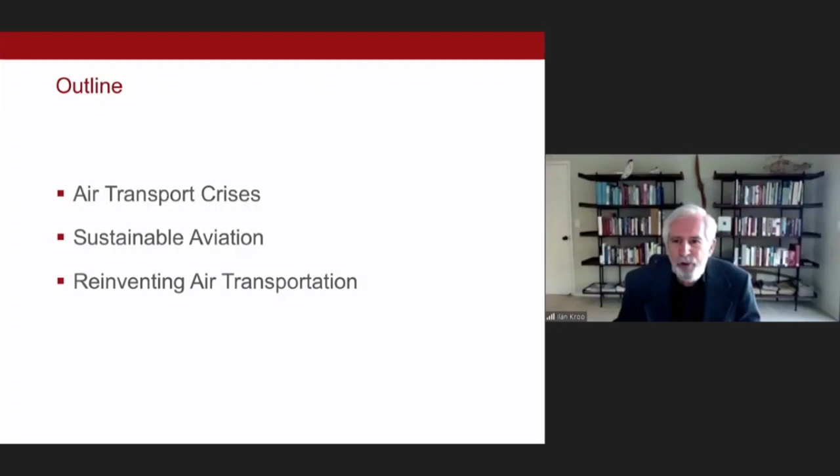So, well, flight and the idea of air transportation has inspired people for ages, from Icarus and Daedalus to children and people of my age all around the world.

And one of those people was William Henson, who in 1843 decided that he was going to build an airline and an airplane company. So what you see on this slide is a picture of a tea towel that he used for marketing purposes to try to raise money for this startup a long time ago.

Don't read the text on the left. I'll read you the important things there. But as you can see, it actually preceded many of the inventions that came much later. So he patented this aerial steam carriage in 1843 and worked with John Stringfellow and Frederick Marriott.

After Henson stopped working on the actual airplane, Marriott continued working on flying machines while becoming a well-known publisher in San Francisco. So it has a local flavor here too, this history. He built several models, some as long as 28 feet.

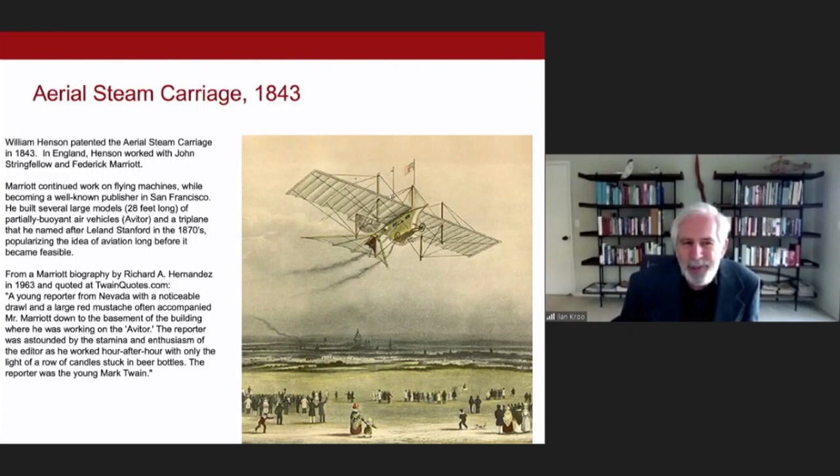So we spend a lot of time with transportation, and this is a plot of the number of minutes spent versus the year. Among other things, you can see that people in California spend more than an hour and a half traveling per day.

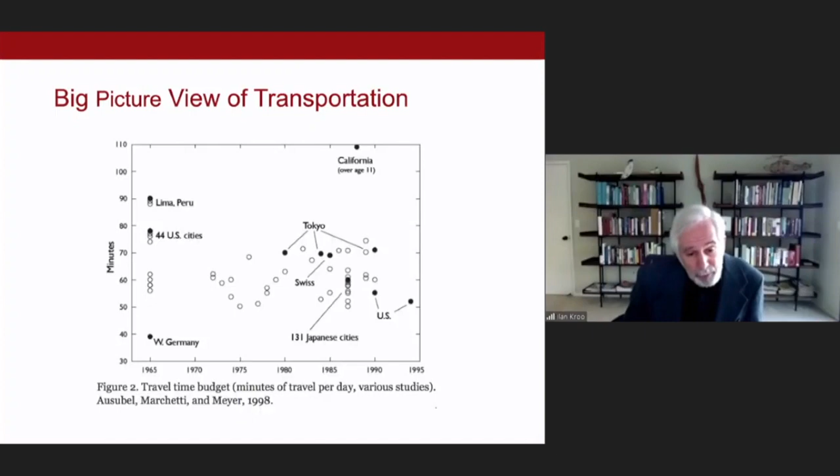And despite the fact that aviation has been around and going faster and faster on the horizontal axis, we still spend a lot of time traveling, whether it's by air or car or whatever. So it's important, even for those of us who are not working in the field of transportation, to look at how we're getting around.

This is the same kind of plot, but it goes from 1880 to 2000-something. On the vertical axis is the number of miles traveled per day, per capita—so it's the range that people travel.

You can see there are different modes of transportation. The highest lines are cars, buses, and motorcycles with a linear fit there. There's walking underneath that. There are trains, which have been actually decreasing since 1900, as has walking.

Air travel has been going up since 1940 or so, and looks like it's going up to at least the year 2000, while horses got down to a very small range by the 1920s. So we are well past peak horse, but we're not, on this plot, past peak air.

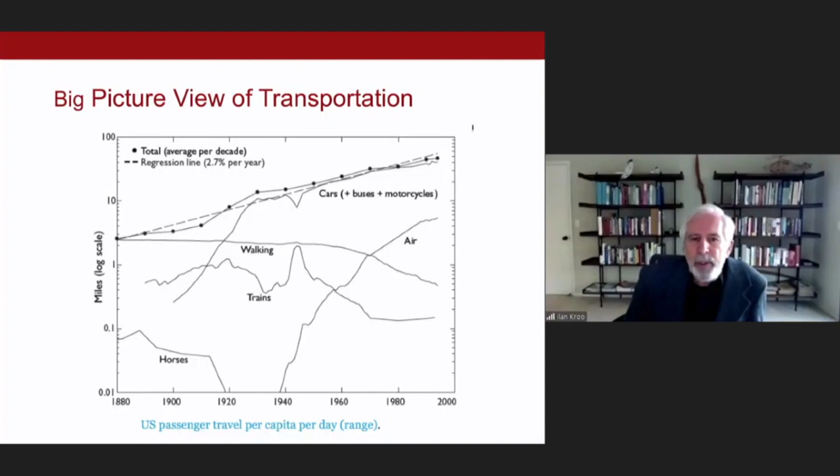So air travel is, of course, very important to many, many people. But it's interesting to look at how it's developed.

This is not going to be a long history, but here is a picture of a 707 in the upper left of this slide. It was first flown around 1957. To the lower right, you see an Airbus A340, which is still flying from time to time out of San Francisco Airport. It first started flying in 1993, but it is a mainstay of several airlines still.

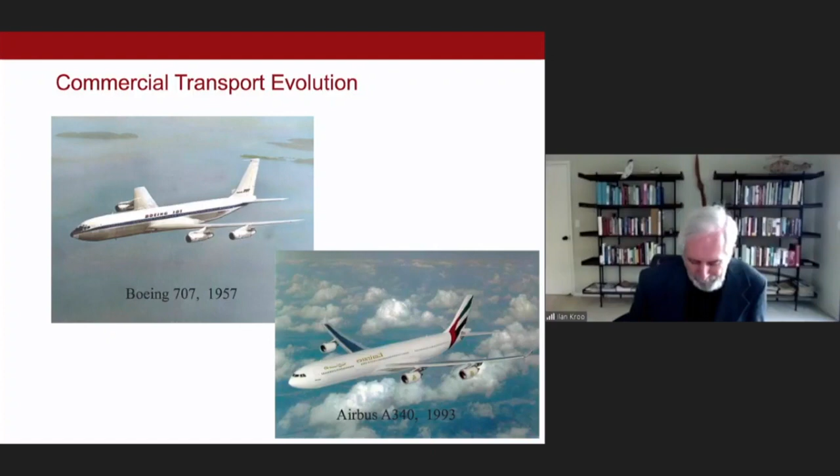The interesting thing about this is that if you ask someone at San Francisco which was a 707 and which was an A340, they would probably not know. They're very similar, and it gives people the impression that not much has changed in 35, 40 years. And to some extent, that's true—the airplanes look like they did a very long time ago. Well, not only do they look like they did a long time ago, but their performance is not terribly different.

So this is a plot which on the horizontal axis is the year that the airplane entered service, and on the vertical axis is a measure of performance. The measure of performance here is the Mach number, which is really the speed divided by the speed of sound—so it's proportional to the speed, times the ratio of the maximum lift to drag.

The ratio of lift to drag, especially when multiplied by Mach number, is usually used as a metric of aerodynamic performance, although people would argue whether that should be the case.

These are for large commercial airplanes. You see the 707 on the left being just under 15 on this scale. A 747 is about 15. A DC-10 is down a little bit less than 15. An MD-11 on the right, in 1989 or so, which was a variant of the DC-10, is up at 15 again.

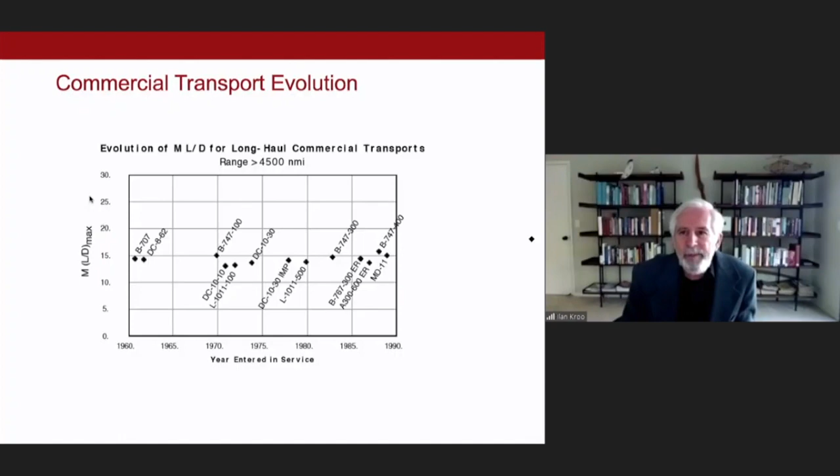So from 1960 to 1990, it looks like there was essentially no change in performance. Not just that they looked the same, but in fact many things about them were quite similar. We'll come back to this in just a moment.

Boeing is very proud to tout the increasing efficiency of their jet transports in recent years. Here's a picture of the Boeing 787, which compared to the previous generation of airplanes, such as the 767, has about 20% fuel savings and about an 8% better specific fuel consumption, which means the engine efficiency. So the engines are roughly 8% more efficient than they were on the 767.

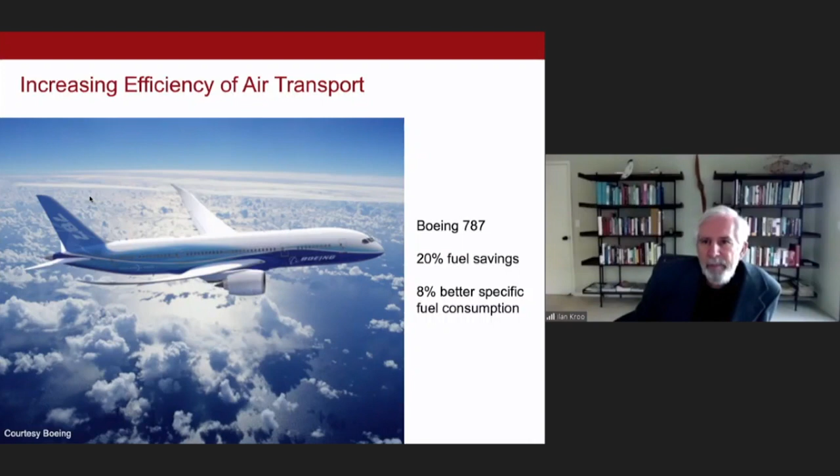So here's where we are right now, a very broad brush look at where we are. But we know that things are changing now in the airline industry, in the commercial airplane business, et cetera. So we're going to first look at why this is not going to maintain a stagnant situation with respect to performance and commercial utility.

So I'm going to talk with you today about these three areas, talking about current crises in air transportation. That's where we'll start, and I'm going to talk about safety, economics, and health. Then I'm also going to talk about some environmental issues that are being addressed and need to be addressed.

Here is a picture of an airplane in 2020 from CNN, and here you see people wearing masks, but packed into this airplane. This has become a very important thing for the airplane companies to focus on: how you can modify the airplane so that people are not in such close quarters and packed in, how you can modify the airplane so the filtration system is dramatically better, and how you can manage the airplane so people getting on don't have to brush by each other. Airbus and Boeing are working very hard at some very new ideas for making these things safer, because they can't afford not to.

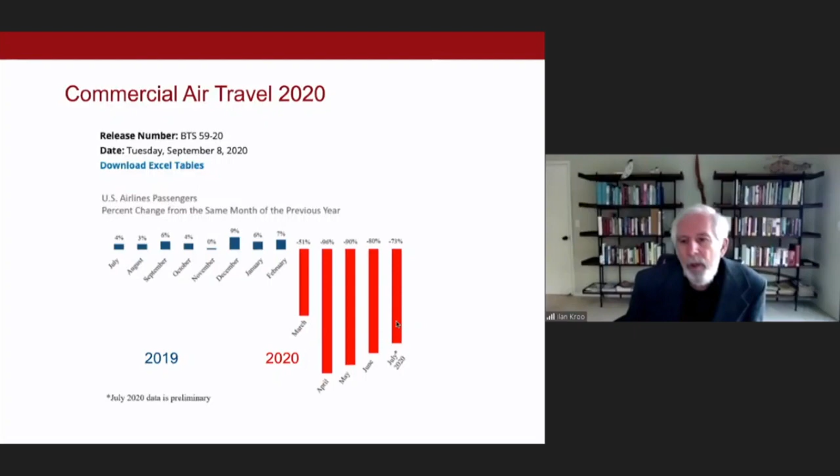So Boeing likes to also show how efficient their aircraft are, for good reason. Back in the 1960s, when those 707s were flying, they were using early jet engines, and compared with the engines in the 767, sort of second generation jet engine timeframe, they used 70% more fuel per seat kilometer. So a huge amount of fuel being used in the early days. These first generations of modern high bypass ratio engines, used on the 727, did definitely somewhat better. The 767 was better yet.

We saw that the 787 used engines that were about 8% better than the 767 engines. Other improvements were made along the way so that relative fuel use combines the engine improvements with aerodynamics and structures. The 787 has a great deal of composite structures, carbon fiber, et cetera, on it. All combined, that leads to a very substantial reduction from Boeing's early airplanes to their current airplanes.

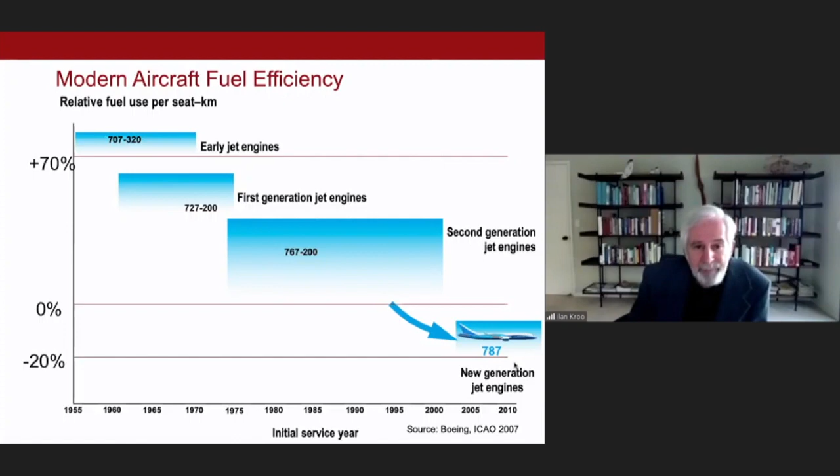They also like to show statistics like this, which are interesting, and they're absolutely right. If you fly from Seattle to Washington, D.C. on a 737-800, and the number of passengers is 80% of the maximum number that can fit on it, which is not a terribly uncommon load factor ratio of actual passengers to number of seats, with those assumptions that airplane can fly from Seattle to Washington, D.C.

And if you take the total fuel required for the airplane and the total number of passengers on that airplane, that translates to 29 gallons per passenger to go from Seattle to DC, which is a whole lot less than a car. This is 81 passenger miles per gallon.

A typical car in the San Francisco Bay Area, if you said it gets 25 miles per gallon, and actually the statistics say that the load factor, or the number of passengers on average, is about 1.3 passengers per car in the Bay Area. That's only 32 passenger miles per gallon, and that's similar to Amtrak, by the way.

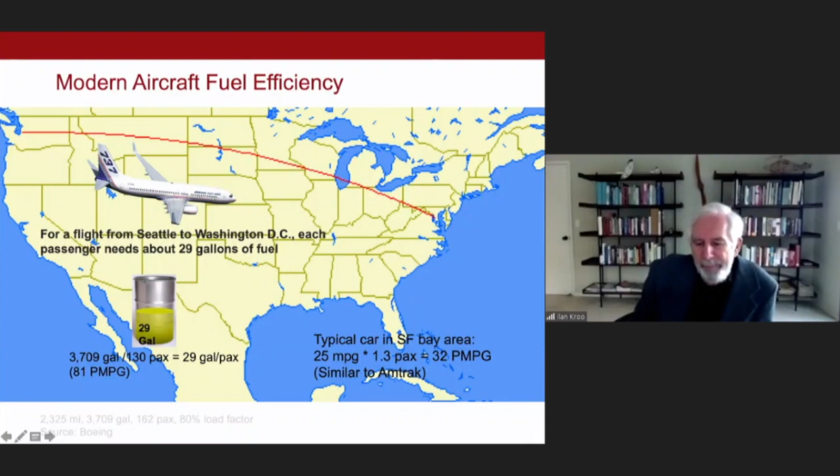However, that's the good side of the story. The other side of the story is that this contributes to the crisis we're having, one of the crises in air transportation.

Transportation in general is responsible for about 13 to 20% of all greenhouse gas emissions. Aviation is about 13% of that. So 13% times something between 13 and 20% sounds like 2% to 3% of CO2. But the net effect is actually 2 to 4 times that amount, and is increasing. It's increasing, or it has been increasing until April of this year. It's increasing because the number of passengers is increasing, the number of airplanes is going up, and the load factor is not changing dramatically.

So from the IPCC report, aviation is about 13% of CO2 emissions globally in the transport arena. Road transport is something like 74%, so it is considerably higher. But that's not a tiny number, especially since this is just CO2 — the contribution to global warming is probably 2 to 4 times as much as the CO2 output for aviation anyway.

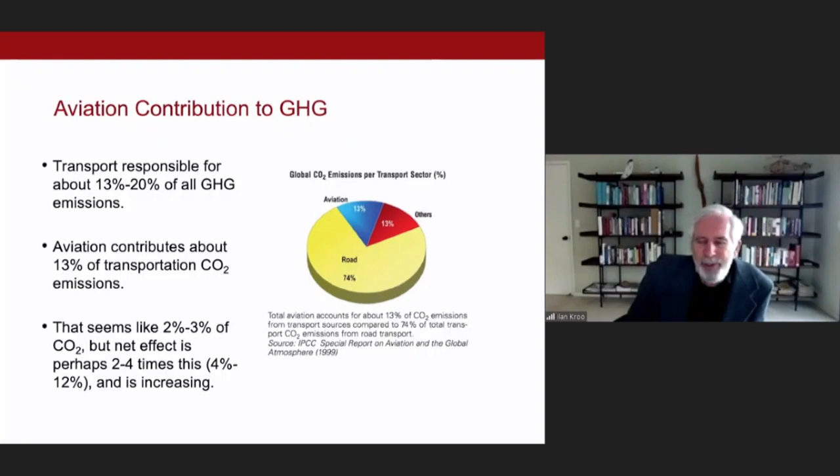So this has been concerning people for the last, well, depending on the person, 20 years, 10 years, whatever. And it's gotten to the point where both public and political pressure is really mounting on the impact of airplanes on the atmosphere. Here's a quote from CNN and Friends of the Earth: air travel is the world's fastest growing source of greenhouse gases. And it is the case that each long distance flight of the 747 adds approximately 400 tons of CO2 to the atmosphere.

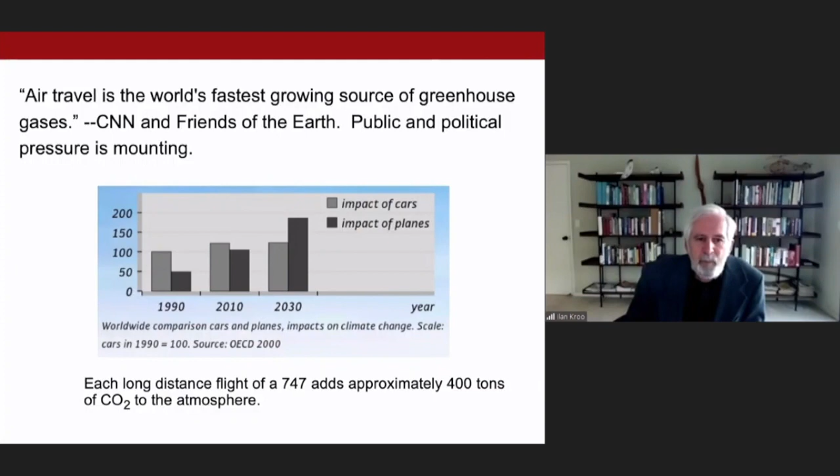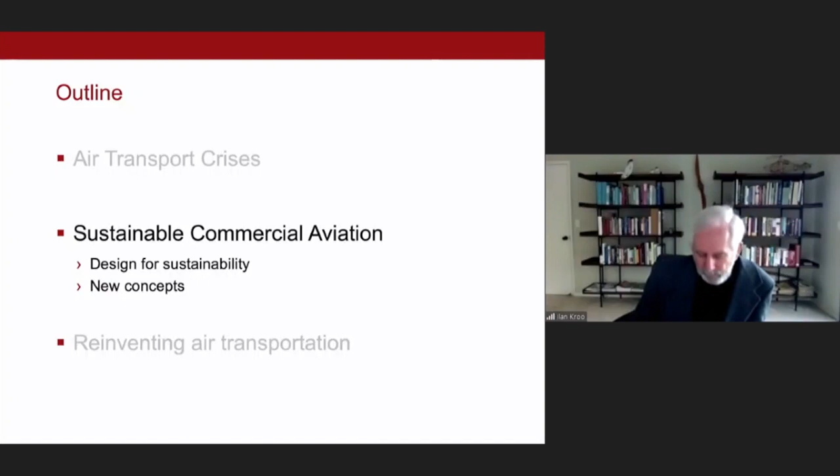So the next topic I'm going to cover is sustainable commercial aviation — how could we take airplanes that cause such problems for the environment and design them in such a way that they don't just make the most money, but also have some significant constraints on the environmental effects. So what I call sustainable commercial aviation includes designing for sustainability, and that involves some new concepts as well. So let me talk about that.

You remember that one of those plots showed the lift to drag ratio times Mach number of airplanes throughout many years. If you translated that 15 to 17 number of Mach times lift to drag ratio to just the lift to drag ratio, all of those airplanes flew at very nearly the same Mach number. The 787 flies a little faster than some of the earlier, smaller airplanes. But we can look at other transportation modes.

The reason you need propulsion, if you are not accelerating but going at a constant speed, not climbing or changing altitude, is to overcome the drag force. So this is why lift to drag ratio is an important aerodynamic performance parameter.

Here's a passenger car, some BMW, and it has a lift to drag ratio. Its lift comes from the reaction of the tires on the road, the vertical component, and the drag is due to some rolling resistance as well as the aerodynamic drag. If you work out the numbers for this particular car, at zero speed or very nearly zero speed, the lift to drag ratio is about 100 to 1, which is good, but the car isn't doing anything, so it's not so good.

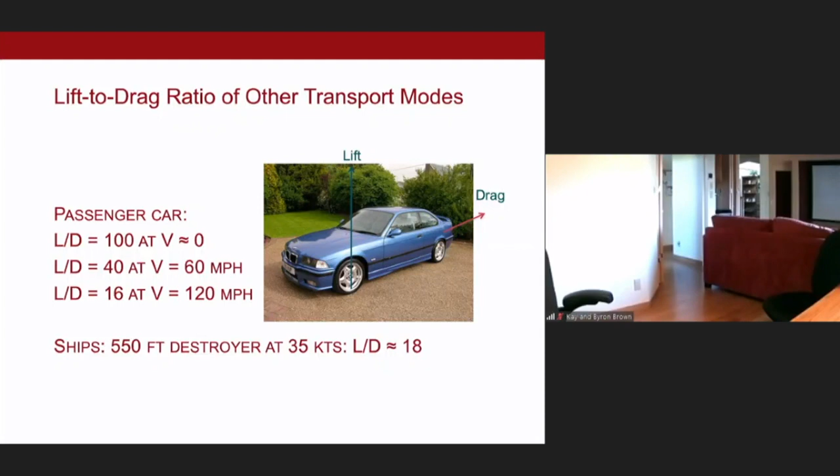So from a fundamental standpoint, what the engines have to overcome besides all those ancillary things like friction and the air conditioner, etc., is the drag. Passenger cars are definitely not, especially for the speed, fundamentally more efficient. Ships can be, if they go very slowly, they're like the car in that they have low drag, but they don't accomplish what they're trying to do.

I found data on a 550-foot destroyer at 35 knots, and the article gave the drag of that and the horsepower required to make it go 35 knots. That translates to a lift to drag ratio of 18 to 1, which is pretty similar to the airplanes. But of course, lift to drag ratio is not the only metric that's important. Speed is very important. That's why airplanes cost more to travel on than kayaks.

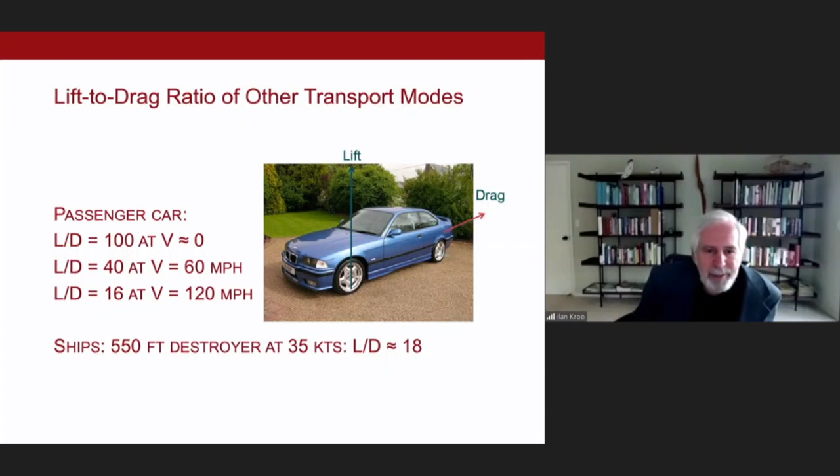But the question is, if everything is about 15 to 20 for L over D, is there anything you can do to the airplanes to change that, or is that a fundamental physical phenomenon?

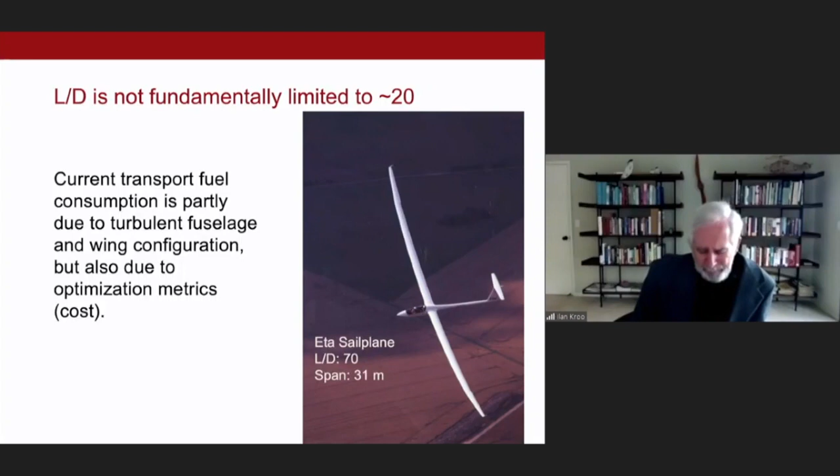Current transport airplane fuel consumption is partly due to the turbulent fuselage and wing, but also due to the fact that people aren't optimizing for minimum environmental impact. So what people do in designing airplanes is to model the airplane performance in general, how long it takes, how long a runway it requires to take off, some of the stability and control requirements.

People estimate the weight of the airplane before it's ever built. They estimate the aerodynamics, the noise, the engine performance, and even the economics, and combine this with numerical optimization to try to get the best airplane, whatever that means.

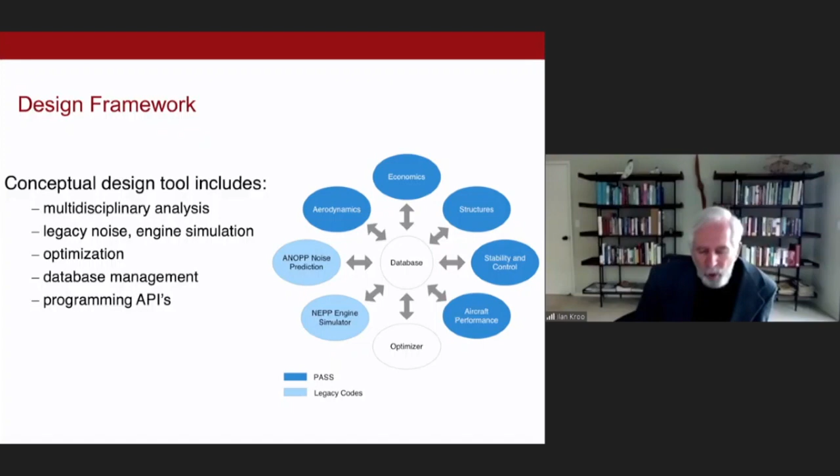By doing that, one really has to think about many different things. While cost is seemingly a bottom line, there are many constraints that go with airplanes. One of them is the economics.

There are also environmental constraints, and passengers, again, need to be comfortable in the airplane, and there are a bunch of constraints associated with regulations that require that you be able to get out of the airplane on the ground in a certain time. So all of these things have to be shown to satisfy the relevant regulations.

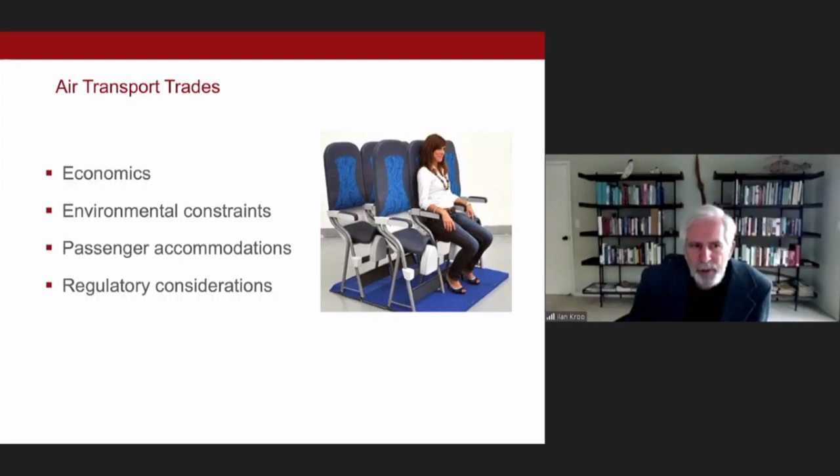We saw a little bit that the optimization included a bunch of environmental constraints, but those are actually very difficult to try to model. And so here, for example, we hear a lot about CO2 and how it affects the warming of the atmosphere.

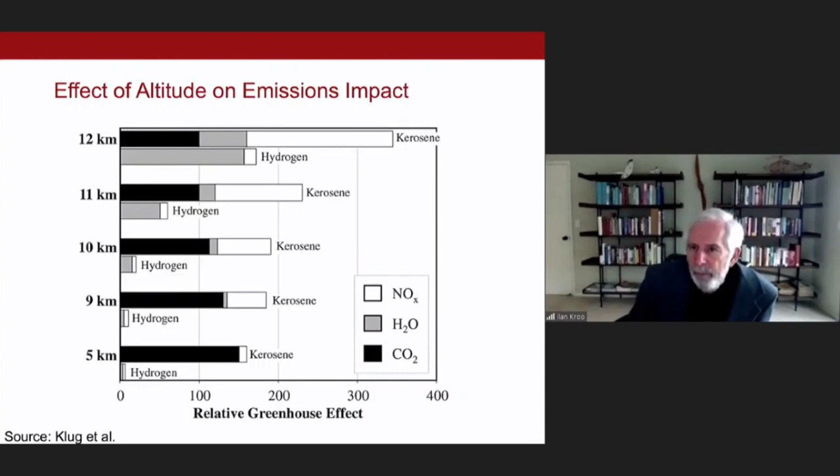But you have to model this very carefully in order to be able to do the optimization, which a student of mine did and which people at the major airplane companies now do. She did this for her PhD thesis, and it was very interesting.

What she did, first of all, was to minimize cost. And she varied not only the flight path and the kinds of engines and the size of the engines, but also the airplane geometry, different wing sizes, different thicknesses, all of these things.

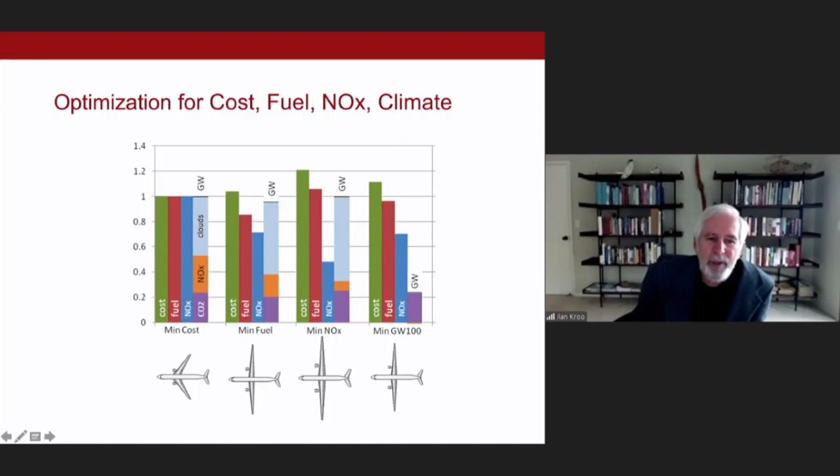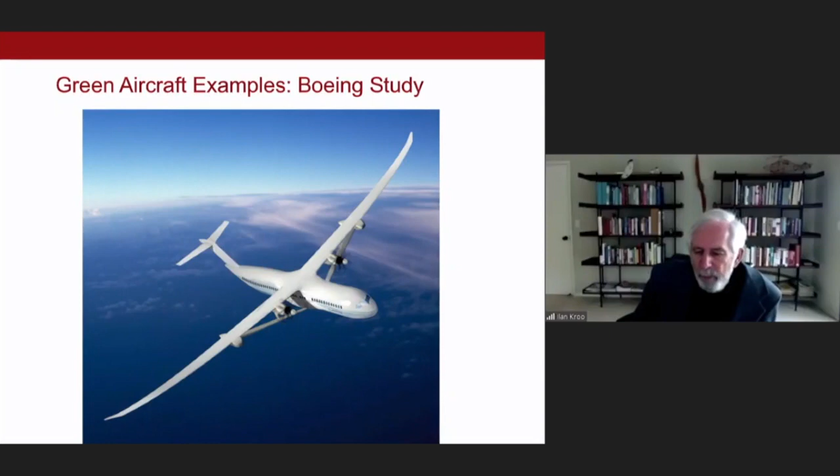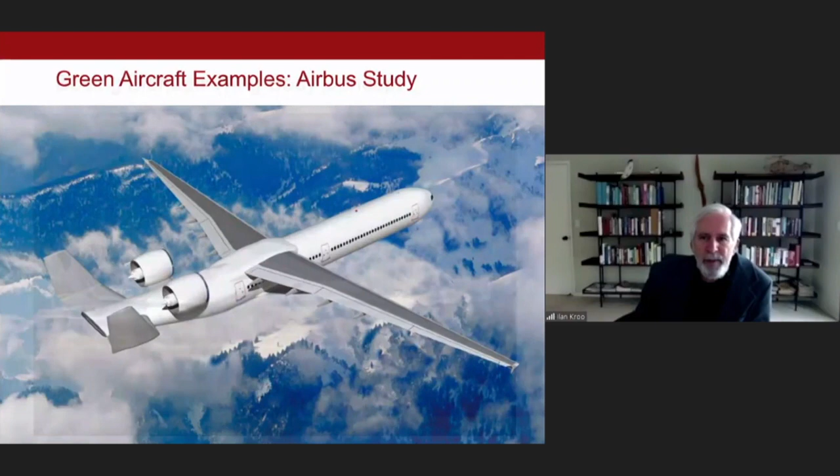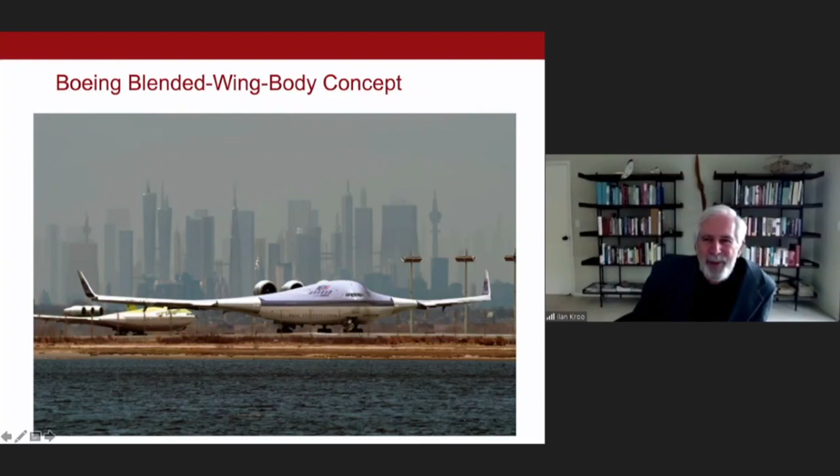So with that, I am getting ready to talk about the last part of the discussion here: reinventing air transportation. I thought, both because it's pretty easy to get zoomed out on these things and get tired of sitting there looking at a screen, we might have some questions and do this more interactively for a few minutes. Luann, do you have anything?

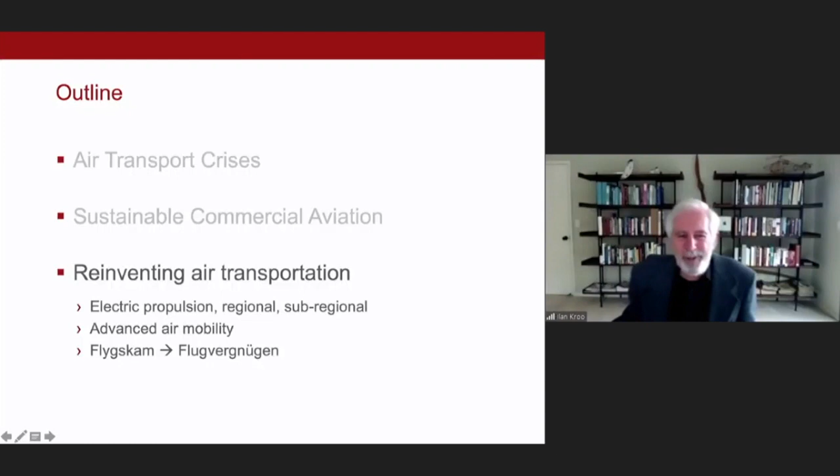Okay, so this last area is associated with doing pretty dramatic things to our air transportation system, and that's why I call it reinventing air transportation. It will deal with electric propulsion and how that might be used in regional or sub-regional - sub-regional being a term mostly used in Europe right now, but we'll probably hear more of that - shorter range commercial airplane flights. Advanced air mobility was for quite some time called urban air mobility by Uber and others doing vertical takeoff airplanes. It's now called advanced air mobility because it doesn't necessarily mean vertical takeoff, as we'll see. The idea here is to turn flight shaming into flight pleasure, which is apparently the German word that's pretty much the opposite of that. So let's see what we're talking about.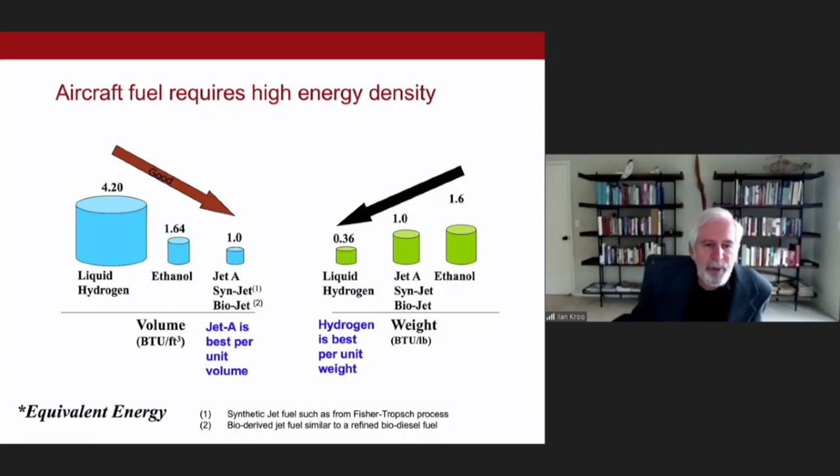But you might also look at the weight. So for the same amount of energy, you get only 36% the weight if you're using liquid hydrogen. Jet A is again normalized to 1, and ethanol has more weight for a given energy level. So you have to look at all of these considerations and all of the other things not listed on this slide that are important possible things to use for fuel for an airplane.

And you have to look not just at energy, volume, and weight, but specific power too - how much power a system can generate per unit mass, for example. On the vertical axis here we have watts per kilogram of specific power. We see that combustion engines are really high up here, producing a certain amount of power per unit mass.

Whereas here's some batteries. Here's a dry cell, which produces a range of specific powers depending on its geometry and chemistry, etc. On the horizontal axis is the specific energy, and by specific power or energy we mean the particular amount of power or energy per unit mass. So specific energy is measured in watt hours per kilogram.

A Tesla's batteries are about 200 and something, maybe 240 at the cell level, watt hours per kilogram. So that's kind of at this point on the horizontal axis. They're also pretty decent at specific power.

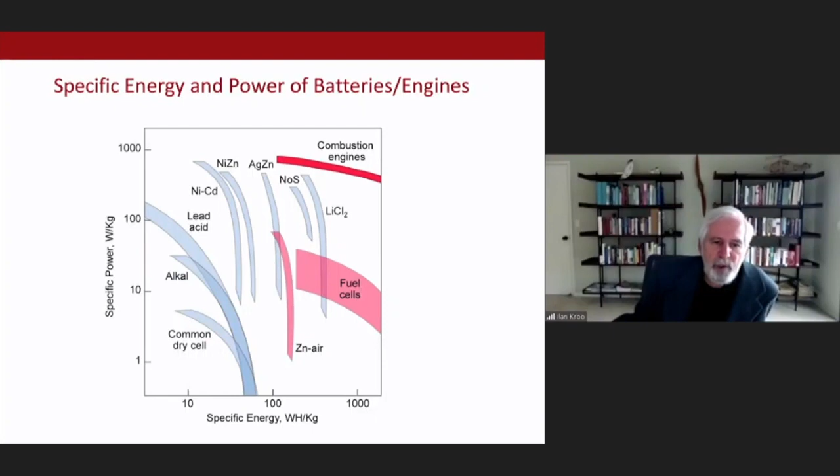Here we have a number of different chemistries that could be used for storing energy in some way. Batteries are very interesting. As I said, the lithium polymer or lithium ion batteries used in a Tesla are something over 200, and it depends whether you're talking about the cell level or the complete battery level, and those can differ by more than 20%. That is, you have to multiply the watt hours per kilogram by 0.7 or 0.8 to get the battery level values from the cell levels.

Anyway, there's a lot of battery research going on. This one is by a company called Amprius, which I think is located in Saratoga - not very far away anyway. It replaces the anode that might be used in conventional batteries with silicon nanowire, and it's actually gotten up to about 400 plus watt hours per kilogram.

This number strikes people as being super important because it really makes many electric airplanes viable. If you have substantially less than this, like half of it, which is still a pretty good battery, you have a very limited range or time in the air, etc.

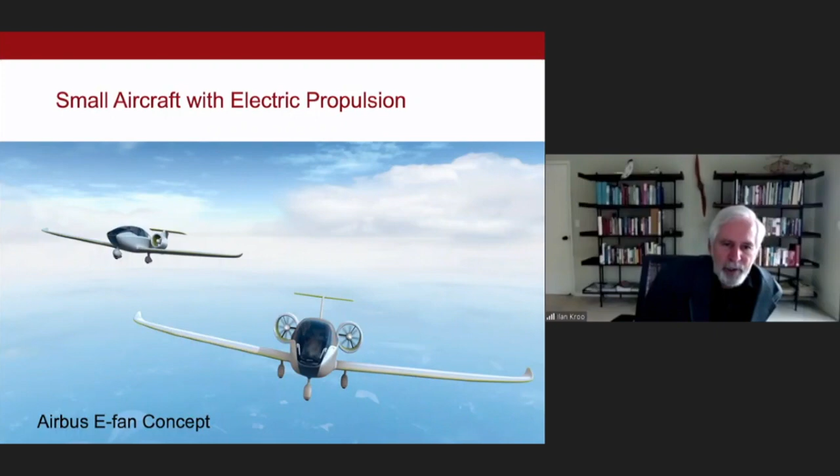So there are many reasons that people are looking at small electric airplanes, and small because the battery energy just scales better at small sizes, where you don't need quite so much power or energy for a given time.

So this is one thing that has excited people, not only for traveling the way most people do in today's commercial airplanes, but being able to get around for regional distances from city to city, or even from one part of a city to a much more distant part of the city. I'll say more about that in a minute. But if you could do that, it would save people an awful lot of time.

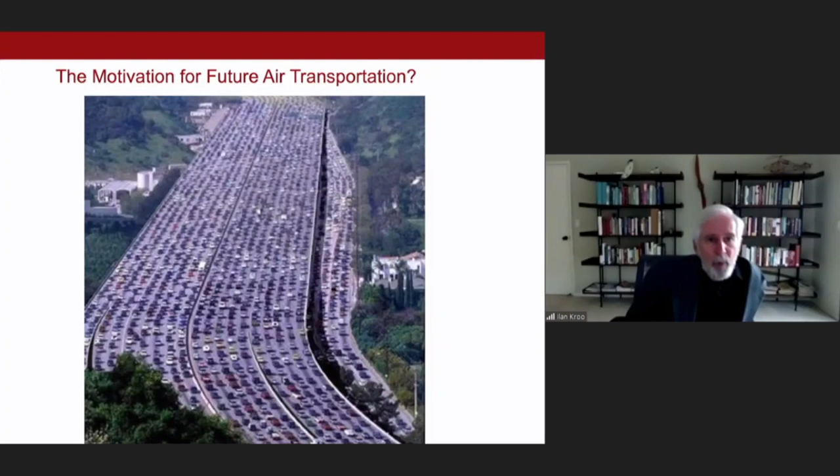So there are now many companies looking at ways to possibly do that. This is a pretty new company called Electra.aero, and they are mostly folks from MIT and others who have been in the airplane business.

This is an eSTOL, an electric short takeoff and landing airplane. It is made to be very efficient and is all electric. This is just an artist concept, so they're working on figuring out just how feasible it is. But the idea is to land on a very short runway, so it could even be this platform out on a river here.

And this looks like New York. But in any case, the idea is that this would hold a few passengers, maybe from 4 to 9, but this airplane is right now just a design concept. It could be very interesting because you don't always have to be flying in an airplane that can go 2,500 nautical miles. So you could do this, which would be very interesting. And I'm quite interested in variants of this, which are maybe less complicated but still might serve the same group of people who want to travel and be very clean and efficient.

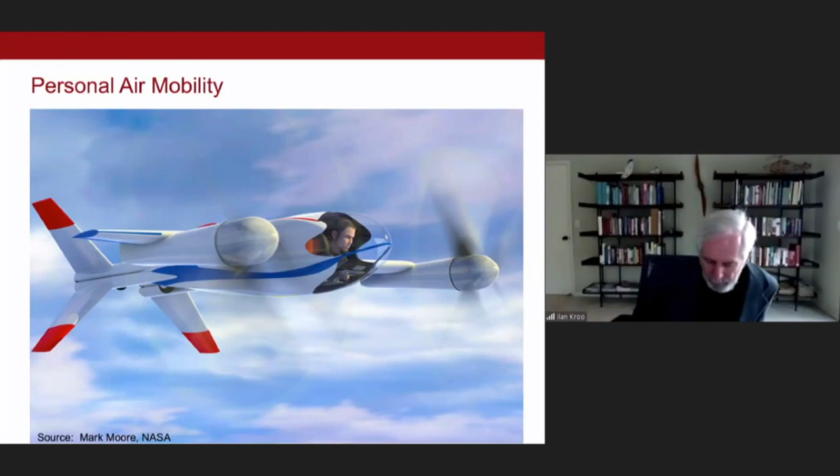Of course, you could just do something like this. This was in the very early days of people trying to do this. These look like model airplane motors, and you need lots of them and lots of propellers, not only to get the thrust needed to take off, but also to be reasonably robust to failures. I don't know the exact date, but relative to some other things that I remember, it was probably 8 to 10 years ago. So these were early days of electric vertical takeoff and landing airplanes.

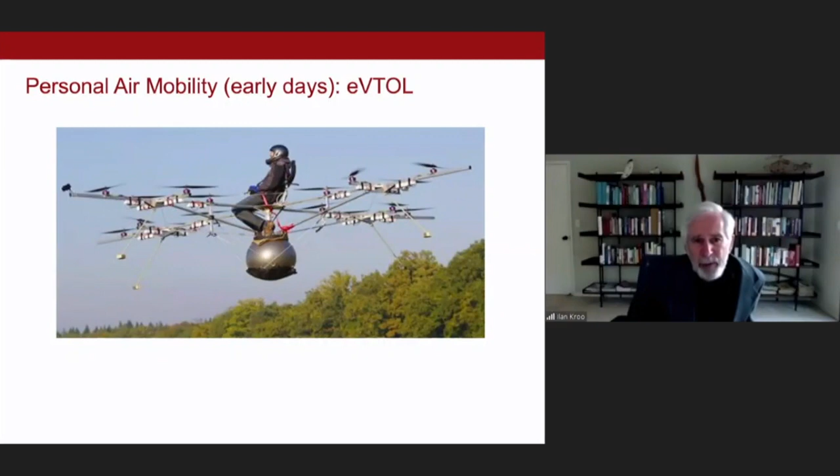This actually became the German Volocopter. And here you see a picture of it many years later. This picture is taken in 2016, and it is flying with the same large number of rotors, again probably for redundancy, and a much more reasonable looking fuselage.

I mention this because there was an announcement today on Volocopter, and they published this picture. It has some very sophisticated control systems. They have been flying for quite a while, and it looks interesting. But the announcement today was that you can buy a ticket, or reserve a ticket anyway.

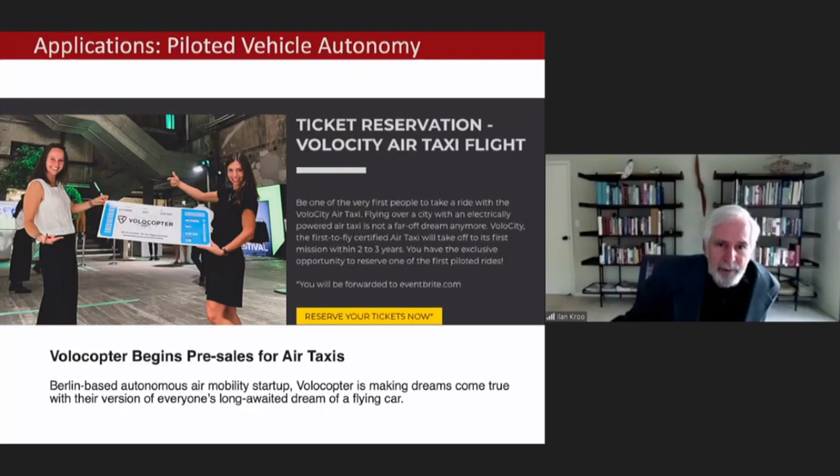And they're selling 1,000 of these tickets, and you just go to eventbrite.com, or you can also just Google Volocopter. It's becoming a lot more believable when some of these folks, like EHang, are flying tourists around for sightseeing in China, and people are delivering medical supplies and all kinds of interesting things. So that's an interesting, nicely put together eVTOL, along with some others.

In addition to designing some very nice camera tripods. That's another story.

Here's a similar configuration that flew quite some time ago, in this case autonomously. And here is the Zee.Aero configuration, which was a prototype for a bunch of other things that followed. This was an airplane that weighed somewhere between 600 and 800 pounds.

We at Zee.Aero at the time built the motors for it, the flight control system, and even most of the structure at one point. But just to show you what this does, let's see if this works. So we were down at Edwards Air Force Base, now NASA Armstrong, and basically put this out on the runway there and hit the perform flight test button. And it did this entire flight test by itself with no input from the ground. So you can see it taking off vertically.

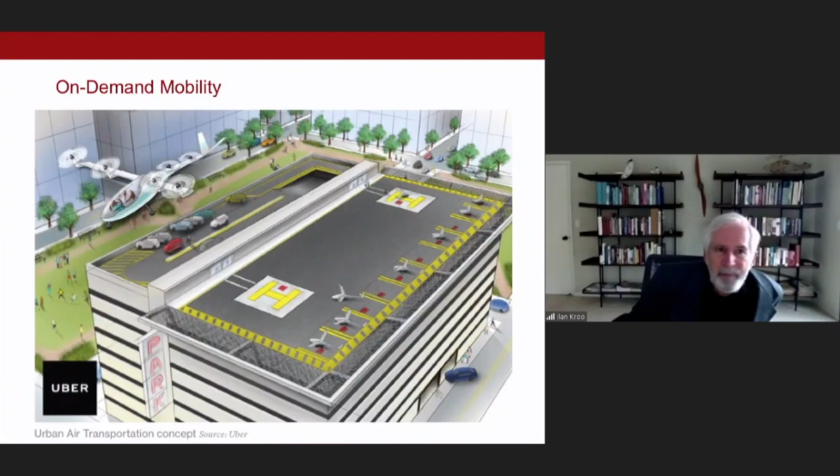Fly to another vertiport in the city, land there, or land at an airport near the city and take an Uber ground vehicle to where they want to go. So lots of possibilities there.

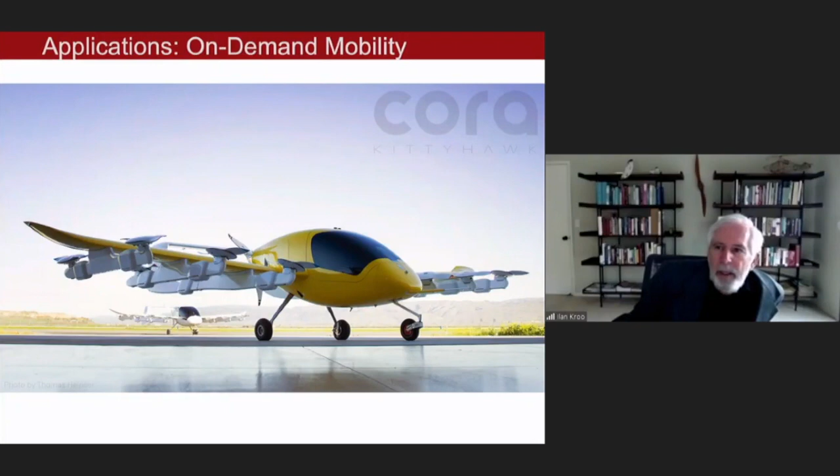Here is the current Kitty Hawk airplane called Cora. It was featured just a few weeks ago on the cover of Aviation Week, and you can see all kinds of interesting things if you look hard at that.

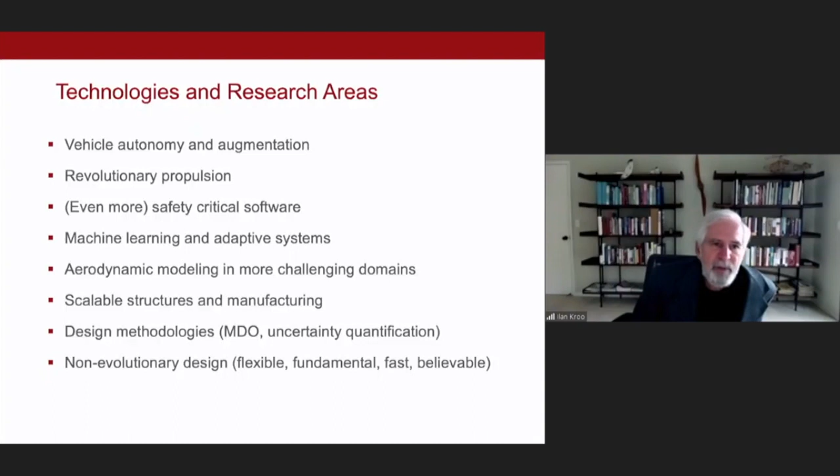Okay, so I'm going to try to wrap things up a bit here and say there are all kinds of technologies and research areas that require work, from propulsion to vehicle autonomy to machine learning to scalable structures and design methodologies. So it's a great thing to do if you're also a professor at Stanford, lots of projects to work on.

In this course, we do all kinds of things from solar power to urban air mobility to search and rescue with autonomous vehicles. And just to wrap up, it does appear that air transportation, revived and reinvented,

has a very exciting future, and I'm very much looking forward to see how things evolve. Thank you very much. I will answer any questions we have time for.

Okay, so there's just one clarification question. Based on the costs you've had in your charts, what does that include? Cost of development or cost of operation for the airlines?